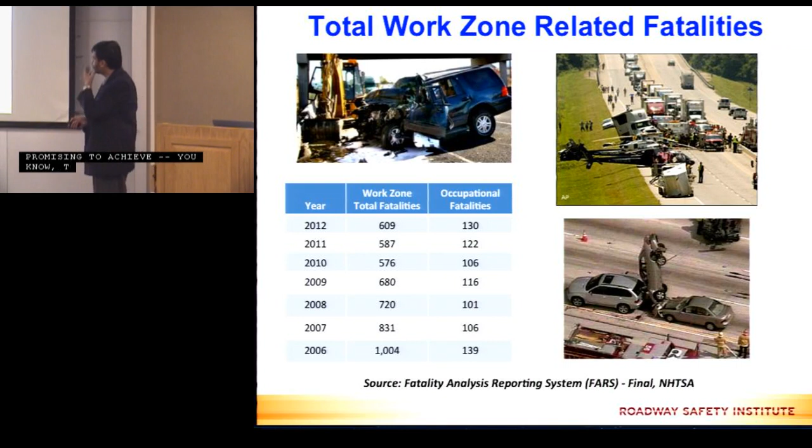So first now I will mention this V2I traffic information system. This is what we did four years ago, but three years ago we kind of demonstrated it. I'll mention first the architecture and design, and then we also did a field demonstration, which I'll talk about. These are my students who have worked hard with me over the last few years, some of them are still with me.

Now what happens is, of course, few cars, as the market penetration grows, not every car will have DSRC units. So we are assuming few cars have DSRC units. So if we put a roadside DSRC unit, we call it a portable unit because only one roadside unit is needed, and you can take it to any work zone location, or even if an accident happens and you have to close some lanes, you could take it there as well. So it's a portable roadside unit which will exchange some dialogue and will pick one vehicle which is just outside of the start of the congestion area.

And how is that found out outside? Because the speed has to be the free flow speed, and we will assume that the free flow speed is the normal speed limit, around the speed limit range. This DSRC will need to be programmed with these parameters, the speed limit etc., and also the road width, which is needed for some detailed calculations, which I won't be able to mention all of, but basically this will be programmed with some initial information needed to make some calculations. So it will pick a car, and then once this is picked, this will keep on notifying it while it passes through the congestion.

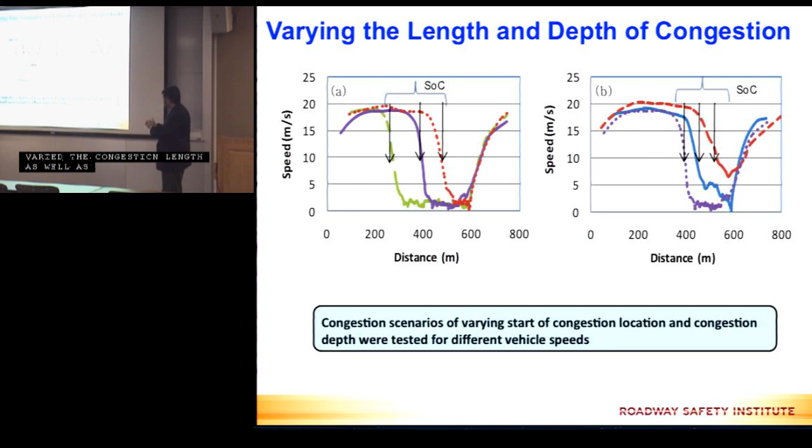So this was the first phase, and then later on we realized - by the way, these are some more results. We repeated the experiment many times. We wanted to make sure our system is robust, and we varied the congestion length as well as the depth of the congestion. Every time it was successful, but again the same problem: the distance is small. So how do we solve that problem?

And then we came up with V2V-Assisted V2I, and I'll mention why we call it V2V-Assisted V2I.

We thought that this can talk to these vehicles through V2V, right? So this can send a message which can be hopped, and then this can send a message back, which can be hopped and reach the roadside units. That's what we call V2V-Assisted V2I, because we still use this roadside unit.

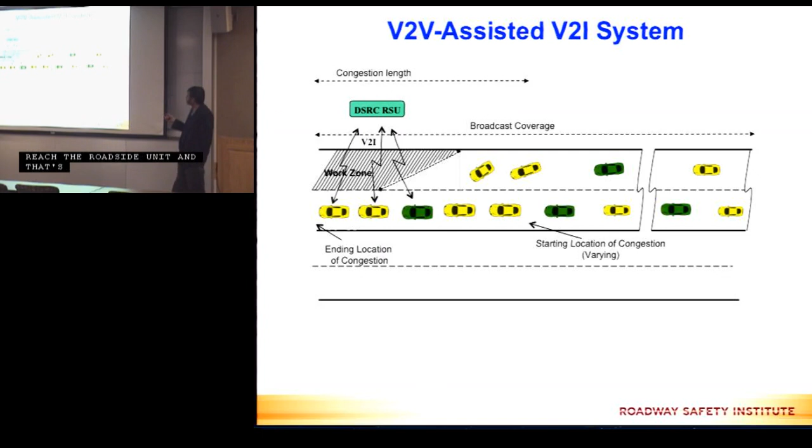And you can see this is what I was talking about, using the hopping mechanism. Doing it that way, you could cover congestion lengths of maybe a couple of miles, 2 to 5 miles, but also another advantage is that you can hop the information message 5 to 10 miles away from the congestion. So vehicles can really know well before hitting the congestion whether there's an alternative route to take, so they can make well-informed decisions. That would be really practical.

This is what we thought, and to accomplish that, importantly, we had to come up with this mechanism of selective relay and directive relay. What is that? I'll mention it - mainly, you want to send the message, and the message is hopped here. You can see these are selective vehicles which are hopping, and also in this direction only, right?

There could be some crossing roads as well, so we want to make sure the message is not hopped by every vehicle that receives it. If that were the case, it would become a message broadcast, bandwidth storm kind of situation, and that's what we wanted to avoid. So we came up with these two algorithms.

One is selective relay. What we thought was that this RSU will be transmitting in all directions, and it could be an OBU too - it will be transmitting in all directions. So all vehicles around it will receive it.

But we want only that vehicle which is the farthest from the transmission origin to hop. And that's why we are picking this, right? So we split that into bands, and all these vehicles, after receiving the message, will wait for a random period of time. The random period will be picked from a window, and for this band the window will be the shortest. So the random wait time will be the shortest.

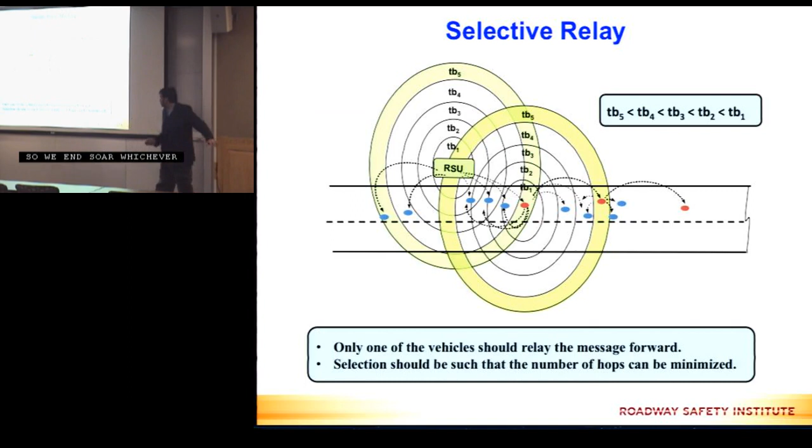And then directive relay, what we really mean is that we want to make sure that the message really goes here. You can see this message will be received by this vehicle as well as this vehicle, from here. So this is the band, the longest distance band, shortest wait time. So these two vehicles will receive it. We don't want this to transmit because the problem is on this road. We don't want to mislead the vehicles on this road.

So what we will do is, there is always a natural curvature of the road which we will measure, and we will compare, say, this angle with the previous hop, right? So this angle has to be comparable. But if you compare this angle with that angle, they are quite different. So it means you are not on that road.

So the natural curvature. We did some civil engineering studies. I don't know if somebody is from civil engineering here. I learned quite a bit of civil engineering, how the road curvatures are designed depending upon the speed limit, and that's how we came up with some of the numbers, some of the limits which we don't have to cross to pass this test before we can hop the message.

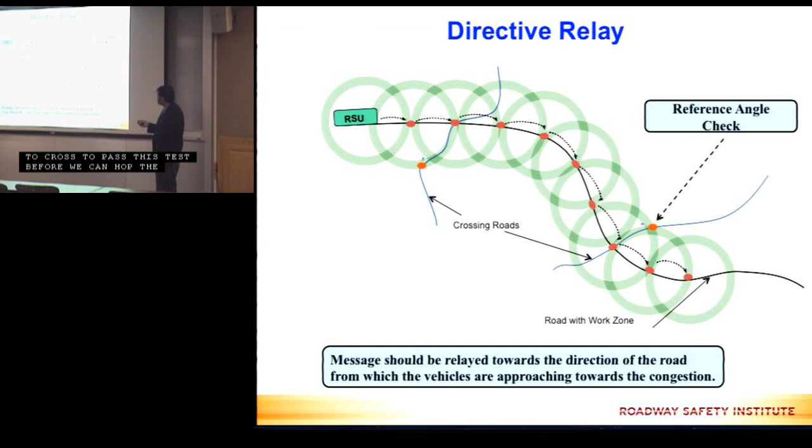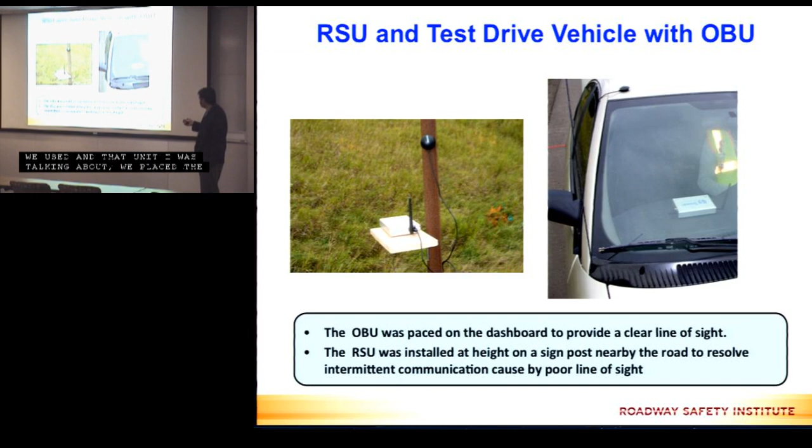As a matter of fact, as of now, we are working not under Roadway Safety Institute, but I'm working with Savari Networks, who are manufacturing some of these devices, on a US DOT funded project to demonstrate this in-vehicle message transmission using hopping algorithms. And this next summer we will be doing much more extensive tests. And once we do that in Duluth, we'll be doing the same tests in Virginia with VDOT, because that is their requirement, that we ultimately do it there as well.

So these were our results. But now the next step is why VMS. We needed to think about VMS integration within our system, and I'll mention what that means.

So market penetration is, again, something everybody asks about. Even now people think, oh, when will we have it, right? Some people think it may be 5 years, some people think maybe 50 years, right? There is really a lot of range in between, when people think they will have DSRC in their car.

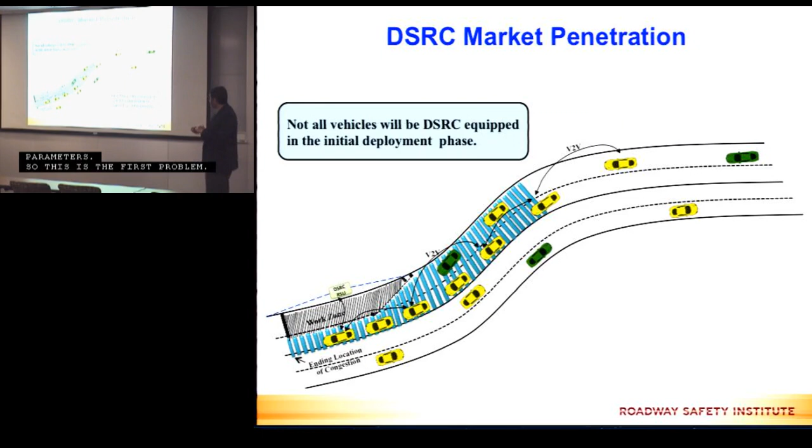And we know that even once everybody is really committed, the market penetration is going to grow slowly, right? First few cars will have it, and then more and more. So we want to analyze how many cars are needed to acquire these travel parameters. So this is the first problem, right? So we did some study on how many vehicles are actually needed to acquire these travel parameters, and we did again

some civil engineering stuff. In a free flow situation, the Poisson distribution, right? The headway and the vehicle count crossing a certain point, right? Both are Poisson distributions, but if this is a congested flow, it could be a uniform distribution between the cars. So we did that, and these are some of the basics of civil engineering. Civil engineering students might be very familiar with these basics. So we used this and came up with these statistics.

And the first thing was that the vehicle which we want to pick before the congestion, we don't want to wait forever before we get a DSRC equipped vehicle, right? That will help us measure the travel time as well as the congestion length. We did not want to wait forever. So if the travel time is in the 15 minutes to half an hour range, we thought a small fraction of that, about 30 seconds or so, less than a minute, we should wait. If more than that, the system is not that efficient. So that was our criteria.

So depending upon the vehicle flow, we can figure out how long we have to wait before we pick another DSRC equipped vehicle in 30 seconds. So this is the average time between two DSRC equipped vehicles for a given market penetration, right? Versus the vehicle flow. And we came up with this, and these are the calculations which we will use to show what market penetration is needed for our system to work.

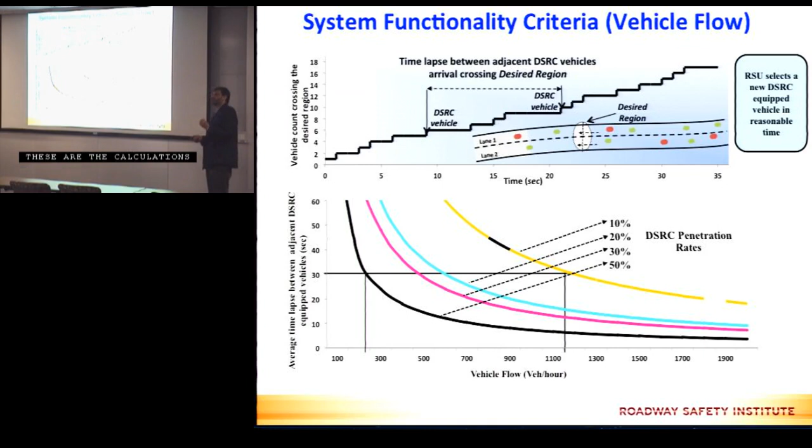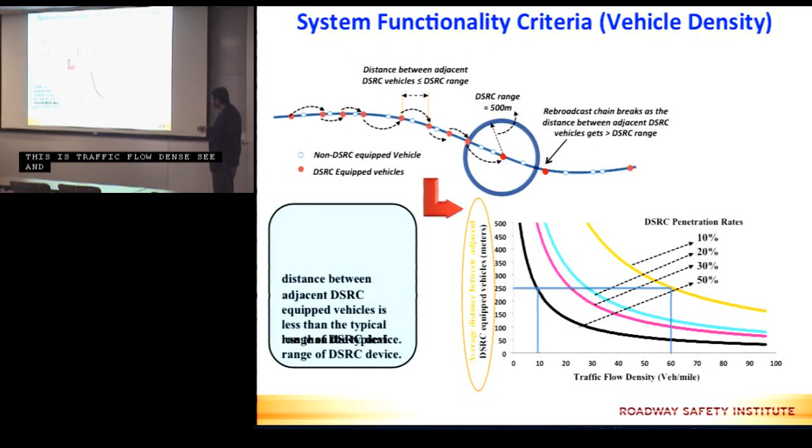Not only this, but we also want to make sure that the message can be hopped, right? If the market penetration rate is low, if the distance between two DSRC equipped vehicles is longer than the range of the vehicle, then the hopping will stop. So we did not want that either. So that really depends upon the traffic flow density, right? But flow and density are related, so that complicates the situation. But this is versus traffic flow density and average distance between two DSRC equipped vehicles for a given market penetration rate, right?

That was good news in a sense, but the bad news was how to communicate this data to everybody. That was the real problem. You can acquire it with a small percentage of DSRC market penetration, but everybody needs to benefit, otherwise it's useless, right? If not everybody is able to see what the travel time ahead is. So to solve that problem, we came up with this idea of VMS integration in our system.

So we thought we will equip these VMSs with a DSRC unit, and they could act as a car, right? When the message is being hopped, they could get a copy of the fresh information message, with the fresh travel time as well as the start of the congestion location. And then it can calculate its distance from the start of the congestion location and display that congestion is ahead in maybe 10 miles, or 7 miles, or 2 miles.

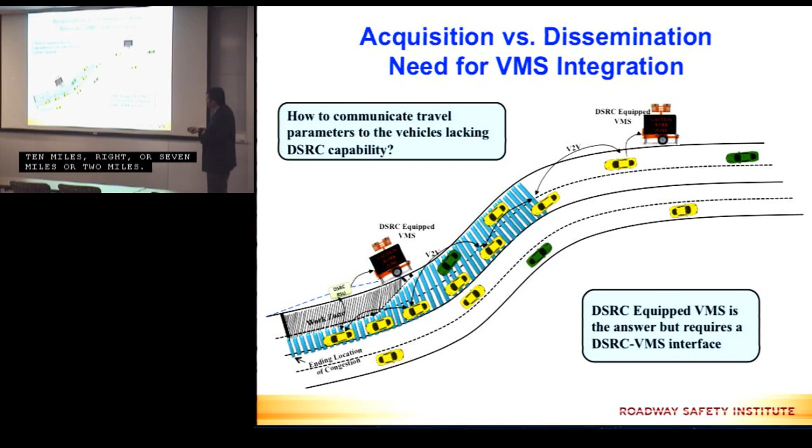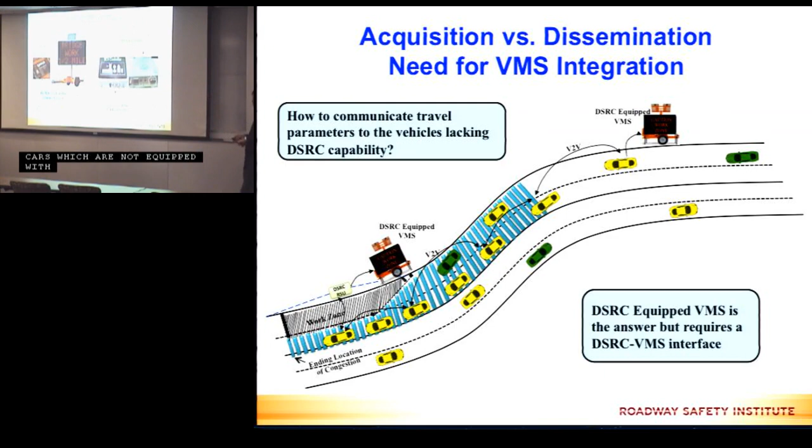And similarly, the travel time ahead will be so many minutes, right? So this is useful for those cars which are not equipped with DSRC units. So I think that's how we came up with this idea, and that's how we started working on how we interface a DSRC unit with the existing VMS.

And we were lucky that MnDOT was able to loan us one of their PCMS, programmable changeable message sign, as they call it, in addition to VMS. So we were able to work with that, and this is the controller of that PCMS which we got. This was the kind of PCMS we got. It's made by ADDCO, and we communicated using this serial port, right? This doesn't have to be wireless connection. This is part of the PCMS or VMS unit.

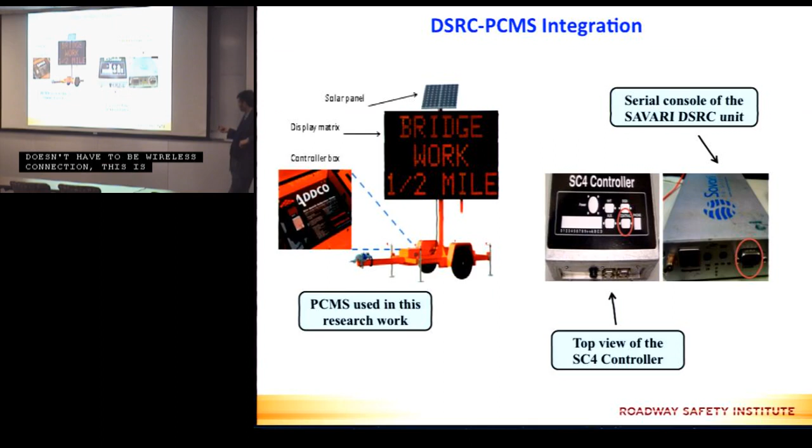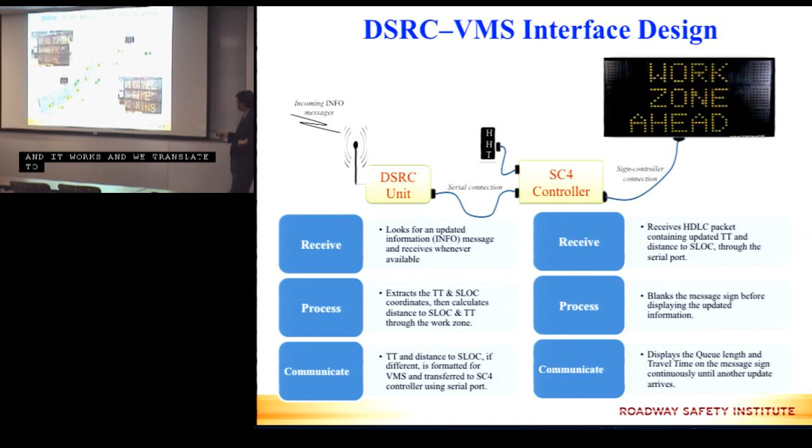And we had to learn the programming part, of course, this interface which was a serial port, and then how to program it, and how to translate the DSRC message into its language. My student actually worked many hours in the big garage there. It was a heated garage, so he even worked in winter time.

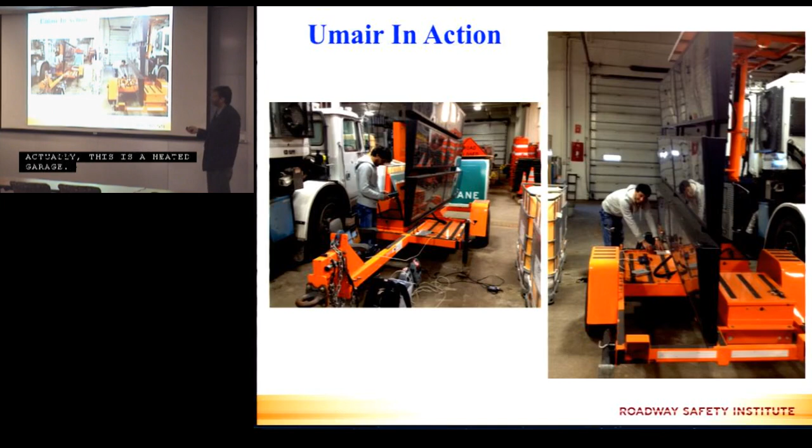And now the last thing, the V2V system. This is actually some of the work which is ongoing, almost done. We're just wrapping it up. I don't have slides related to that, but I'll mention it because it looks like we still have some time. But before leading to that, let me summarize the stages so that you know why we need this. So this is the current work, right? I'm leading towards it; current work will come here.

But this is something which we did the first time, right? The RSU, and this is about half a mile or so, right? So this was our first step, and we were able to design the V2I system. And then V2V-Assisted V2I, because we thought that's not practical. To make it practical, we have to make sure that we cover the practical lengths of work zones. And this is the V2V-Assisted V2I, right?

And then we had to integrate DSRC-equipped VMS in it, so that, although a small percentage of DSRC-equipped vehicles were needed to acquire traffic parameters, to disseminate to everybody we needed this. So we did this. So it is still a V2V-Assisted V2I system, but with VMS integration. This is not right yet, but it will become right because that's what we are doing now, right? We want to get rid of that.

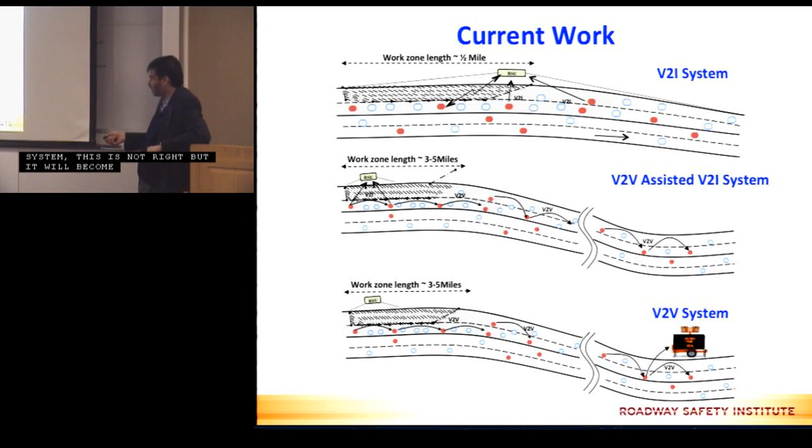So why do you need to get rid of that? Because it's a roadside infrastructure, one device. The whole system will depend upon this. If something happens to it, human error can happen, in programming and inputting some of the parameters. So the whole system will fail. So you don't want that. So we want to see if we can make it independent of that.

To make it independent, the first thing you can imagine is how to pick this vehicle which is outside of the congestion. How do we know? So we have to again revert to traffic flow engineering: when you hit a congestion, what usually happens, right? You see something, right? In the nighttime maybe the red lights, or even in the daytime, right? And then you start braking. So we want to use that as a trigger to pick a vehicle from the road. We'll call it an ad hoc host. So once we pick an ad hoc host, that will basically go the same way.

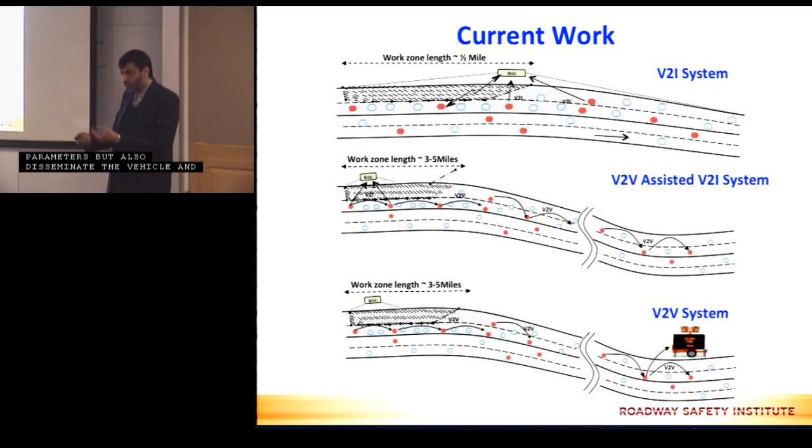We'll calculate the travel time and congestion length, and the ad hoc host will do the same job as this was doing. It will not only acquire those parameters, but also will disseminate periodically, and those messages will be hopped the same way, right? And so that was the only additional thing which we want to do here.

So the congestion, basically this is the same system we want to show, but we want to pick this congestion. But how do you really pick when the vehicles will undergo that threshold of braking? Then they will issue a trigger message, and that trigger message should not be random. Any person can sometimes randomly brake. We want to avoid that.

So multiple vehicles will undergo that braking profile, and then they will issue the trigger. The trigger will be received by the vehicles which are a little further behind, and they will see there is congestion ahead, and then we will pick one vehicle from these vehicles which have received at least 2 triggers, so that this vehicle is still in free flow, and it will be able to undergo that speed reduction and then speed up again.

So that way, this will be the congestion length, this will be the start of the congestion location, in terms of long lat coordinates. So that's how we want to make it work. But what should be that threshold to issue that trigger? Now we came up with this, and we just learned this. This is well documented in civil and traffic flow engineering literature.

And this is the standard braking profile. This is the cautious braking profile. Means if some drivers are really cautious, they brake well ahead of time, right? Some are really emergency brakers. They won't brake until they have to, 11th hour, right? So that is the deceleration. So very high deceleration, reasonable deceleration.

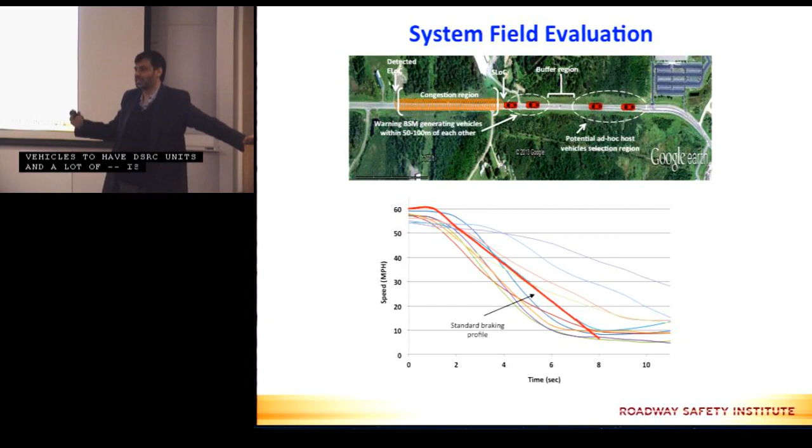He developed the algorithm, and we did not test in the field because it requires many vehicles to have DSRC units, and a lot of synchronization is needed. But in the lab, he did that. He drove these DSRC-equipped vehicles with GPS on a road and simulated various congestion.

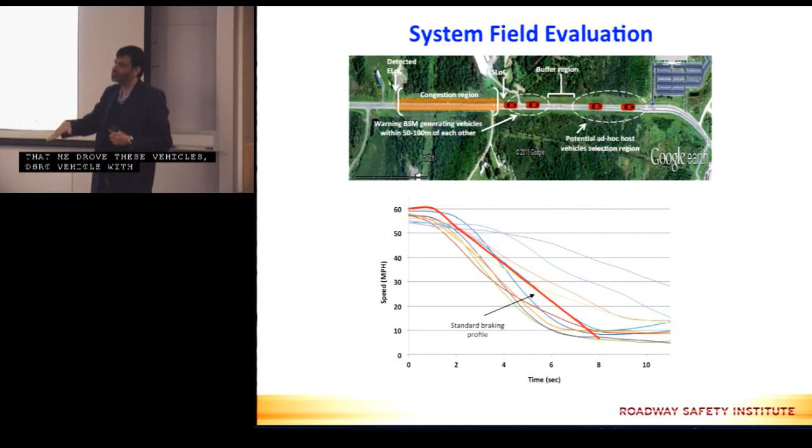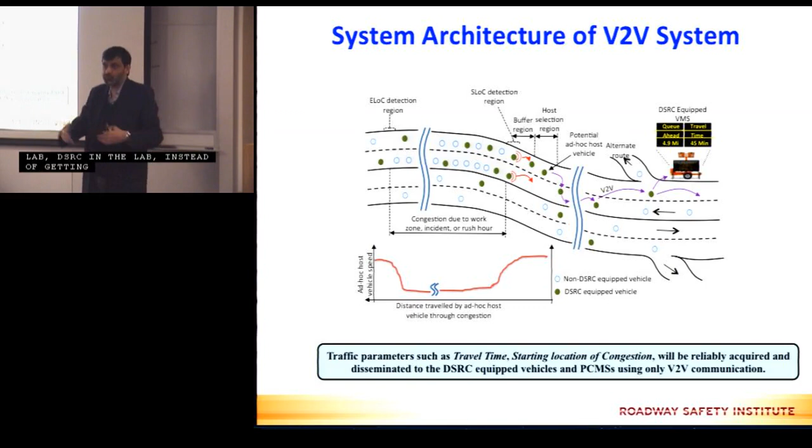If I go back, he simulated various practical scenarios, going down and coming up, right? So he had many of them, and then he used them in the lab. Instead of the DSRC device getting actual GPS data, it was picking from one of these files, so we were simulating that those devices are actually on the road. So the GPS is the only difference; otherwise, they could communicate with each other, and using that he demonstrated that his algorithm is working well.

And I don't have those slides with me unfortunately, so I won't be able to show you that, but that's what we just did. So these are the two main problems with the V2V-based system, and we tried to solve that, and that's it. That's why I took more time on that; I wanted to get you some information on that. I think that's about it.

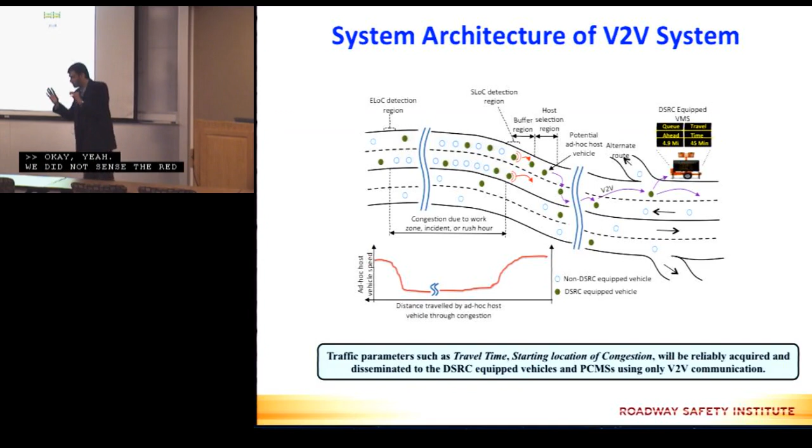Okay, yeah, we did not sense the red light. I was only using the analogy that when you see a red light, you brake. So I think this is automatic. Let me just see, maybe here, right?

So each vehicle will be actually acquiring GPS every second, for example. Now actually GPS can acquire every tenth of a second as well, but every second it is acquiring a GPS reading. It's calculating its speed as well as deceleration. So as soon as the deceleration is below a certain threshold, which was 3.4 meters per second squared, or minus 3.4 meters per second squared, then it means there is a problem.

So that's one indicator, but if this can happen randomly—if it goes down and then suddenly comes up again—we will ignore that. But if it comes down and stays down, and the speed also becomes less than the free flow speed, then that is the criteria which we use. This means the vehicle should have that equipment in it, as well as that program running, so that it can detect there is congestion and my speed is reducing.

So it's a speed reduction mechanism which we are using. We're not using any accelerometer—we could use that too, but here we are just taking the GPS reading and calculating the speed and deceleration. Based upon that, you can determine whether the speed is being reduced or not. So what was the frequency of this speed?

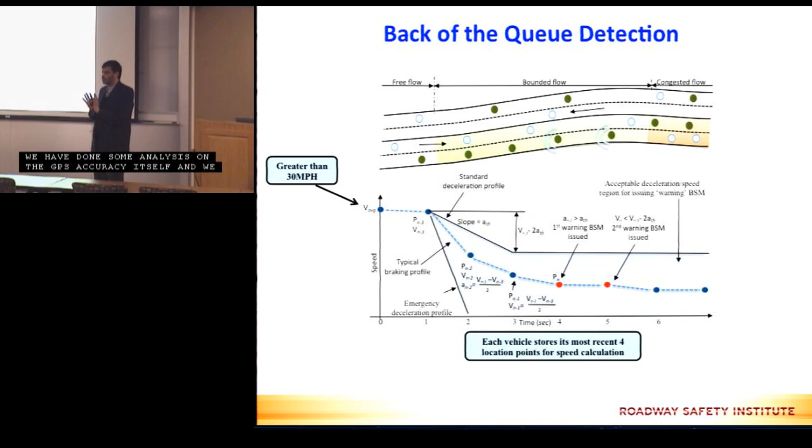That is to ensure that GPS accuracy was not hurting us. We've done some analysis on GPS accuracy itself, and we thought it was around 5 meters or so in the urban area. In the rural area we got better accuracy. So within 5 meters or so, we wanted to make sure it takes about 3 to 4 seconds, but not detailed sensitivity on the actual velocity.

Is there any future evolution of DSRC? Are they thinking about broadcasting other information besides velocity, like control inputs, someone pushing the brake? Wouldn't that make things a lot easier? Is that part of the future plan?

I don't know, but that is absolutely true. As a matter of fact, the project we are doing, we're not necessarily broadcasting the velocities. Rather we are working with the work zone people and the state and federal stakeholders on what important information you want us to transmit in our TIM message - the traveler information message. This is a standard message, just like BSM, basic safety message, that is where you broadcast. BSM is not necessarily supposed to be for broadcasting.